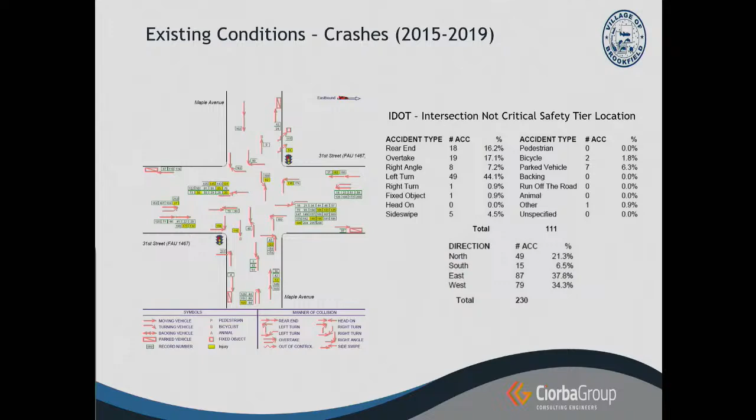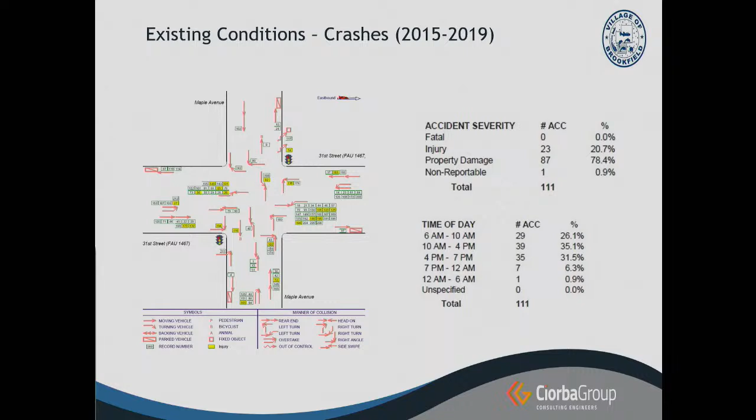As far as the accident severity, 23 of the 111 crashes involved injuries. There were no fatalities within the intersection, and the crashes occurred primarily during the early morning rush hour, the evening rush hour, and at lunchtime.

As far as the existing conditions within this area, it's been noted that there's been an excessive wait along Maple Avenue. We've also been informed by IDOT that there's detector loops that are defective at this intersection. So that might mean that if you're a car waiting at Maple Avenue, the detector loops may not sense you, and it may not switch to a green light for you to get your movement in.

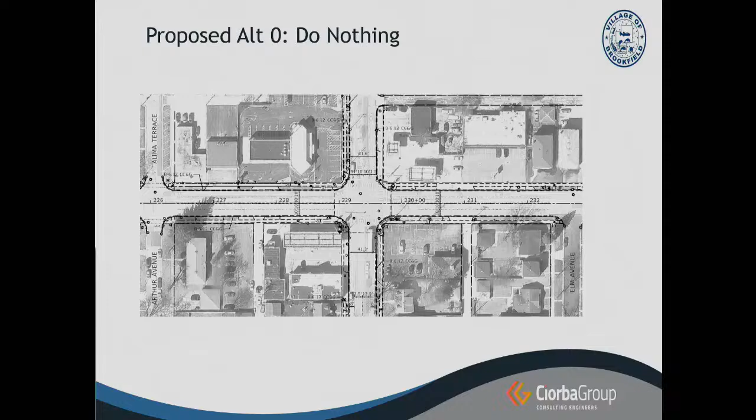The alternates that we looked at, the first one is the do-nothing alternate. And the obvious advantage with this is it's the lowest initial cost. And there could be the chance that the future signal loop repair done by IDOT will improve the performance at this intersection.

Disadvantages. Can I ask how big of a fix is that? I mean, that's something that would seem like would need to be done no matter what is done. Is that a major repair? No, I don't think that's a major repair. It may just be something where IDOT is going to try to do that repair in conjunction with a number of other intersection improvements. So they may not go out just to fix one detector loop.

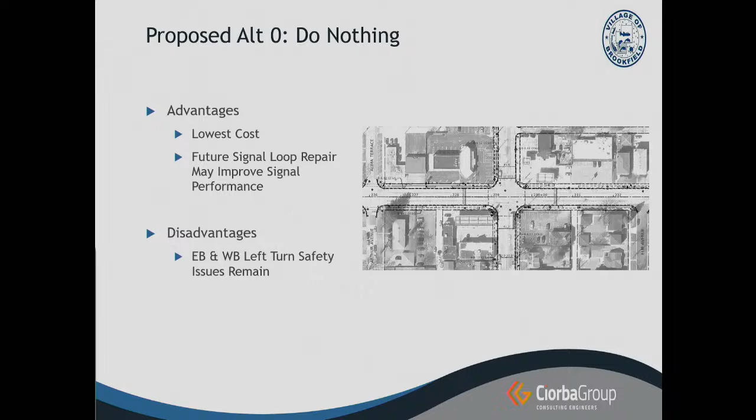They might. Because if I'm not mistaken, there was a problem at 30th and Maple that I think was addressed recently. And it didn't seem like it took that long to fix it. But it was just more of a side note. It seemed like it was not that big of a deal to get it fixed, so. Okay. Yeah, but I haven't heard anything more from IDOT on if that has been repaired or not, but when we asked them the time frame, they said it could be a while before that's done.

Do we know if that's been an issue for a while? Yes. Within years? Yeah, yeah. Well, and I guess in a way, you kind of feel better, hope, that, because I think we've all said that. I'll verify it when I go home tonight. At least 5 years.

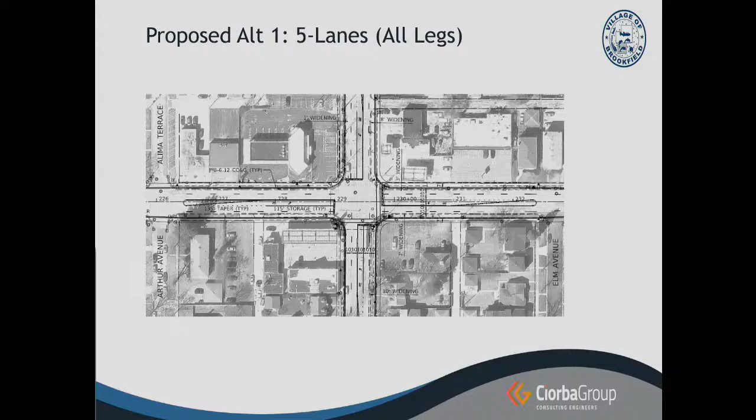One of the first alternates that we looked at was going all in and keeping 2 lanes of traffic in each direction on all legs of the intersection and adding a left turn lane. Now, some of the advantages, we're adding a left turn lane at all legs, so left turning traffic can queue up in their own lane. And we have 2 lanes through all directions, so the intersection capacity will be the largest with this alternative.

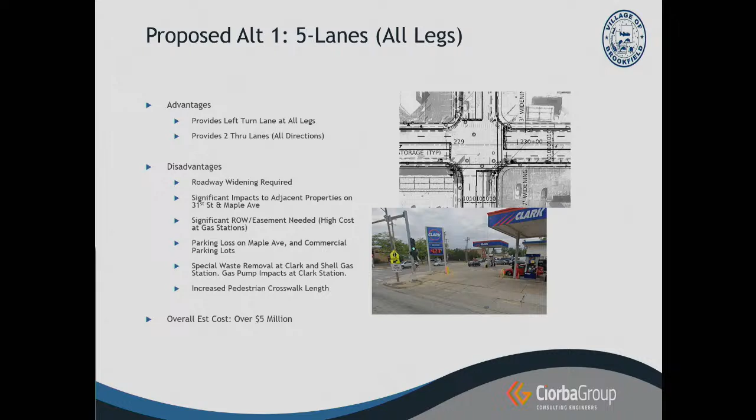The disadvantages are with adding the additional lane, you need to widen the roadway, and this will have significant impacts to the adjacent properties, especially the gas stations at the northeast and southwest corner of the intersection. In addition to the gas stations, there's other adjacent properties that will be impacted. And when you're doing any excavation near the gas stations, you're more likely to have special waste issues with that. The overall cost for this project is, we didn't get too much into the details, but roughly about $5 million is what we were estimating.

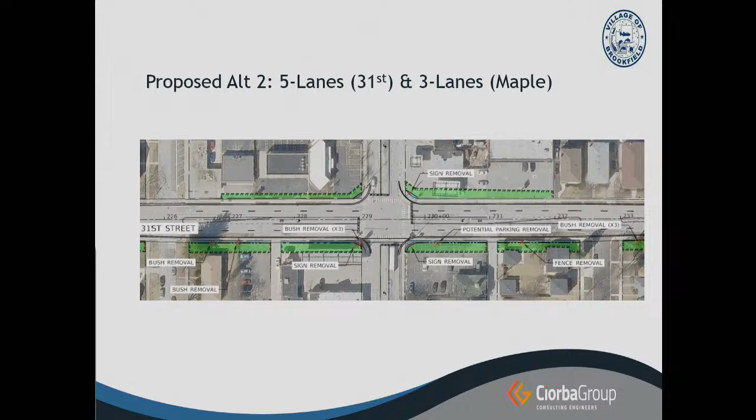The second alternate that we looked at involved providing a 5-lane section along 31st Street and then providing 3 lanes on Maple Avenue. In this alternate, again, we're providing left turn lanes at all legs, so that should improve the left turn collisions. We do have 2 through lanes on 31st Street, which has more traffic on it. And the way we have it striped, it will be very similar on the south leg of Maple Avenue, so we anticipate that there'll be no parking impacts there. This will have to go through IDOT, though, for them to ultimately approve that option.

The disadvantages, sorry if you could back, disadvantages, there's still the roadway widening, and there's still significant impacts like were mentioned for the first alternate, just not quite as severe. The cost for this one is estimated to be about $3 million.

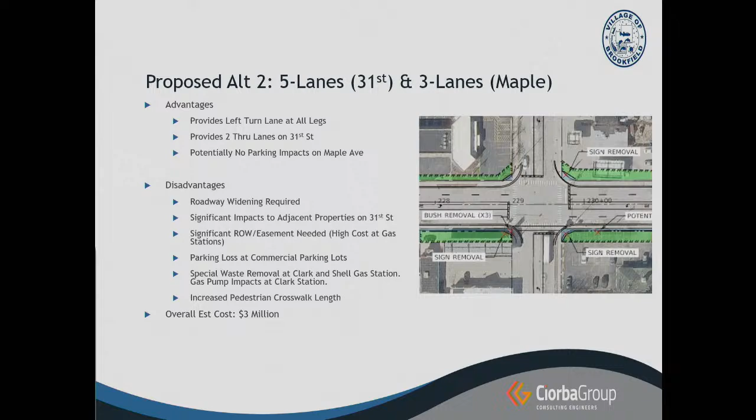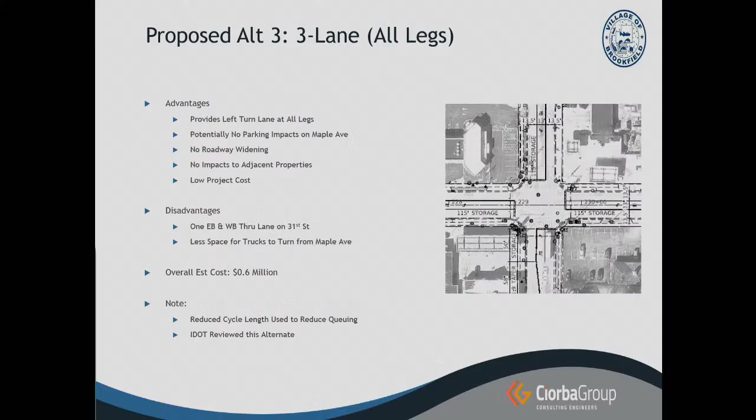As far as the levels of service, just for some background, it's kind of like grades in school. Level of service A is very good. Level of service F is very bad and very congested.

So this is increased traffic within the area. And if you go with the full cycle length along 31st Street, following the signal timings that IDOT currently has...

we had an issue on the north leg, or the southbound movement for Maple, where we had a level of service of F in our analysis. But we were able to, if we reduce the cycle time to half of what it currently is, get more green time more frequently.

That seemed to improve the level of service for the intersection from the analysis that we had, and that should also reduce the amount of queues in the intersection overall.

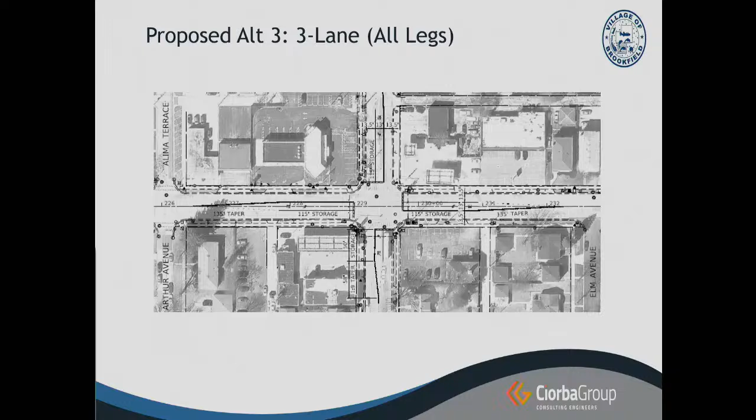So I have a couple questions. One, President Garvey was asking about the trucks turning on and off from Maple onto 31st. I noticed we have - Stevie, can we go back to that drawing, I think it was option 3? So Mark, I see we're shifting the left turn lanes where they overlap the center.

Is it an IDOT requirement to have those line up? Couldn't we leave the left turn lanes where they're at on the center line and keep the same turning radius, with offset left turn lanes instead? That's a possibility, but the issue with offset left turn lanes is that your line of sight is blocked - if you're making a left turn westbound and someone else is making a left turn eastbound, you're blocking each other's vision. And I think that's kind of the existing issue out there right now - you don't have the sight distance, and the number of crashes may not be reduced at all by that.

Understood, yep, I agree. And just for clarity for the board, I want to express that. And then also, we do have a left turn signal on 31st Street to let some of these cars clear out of the left turn lanes - that's one of the advantages.

Derek, can I ask a question? So when you were talking about the left turn, when you stop at a red light to make that right turn for trucks - is it not possible to have the left turn stopping point set back a certain number of feet before the intersection?

Yeah, I think that's something we would anticipate, where they've set back the left turn lane, like we have it at East Avenue in Ogden - that could be a possibility to provide more space that way. So this turn lane, instead of being equal, would probably be set back in here. We can also look at larger radius improvements to help the truck turning, but you have to weigh that against the impact to private property.

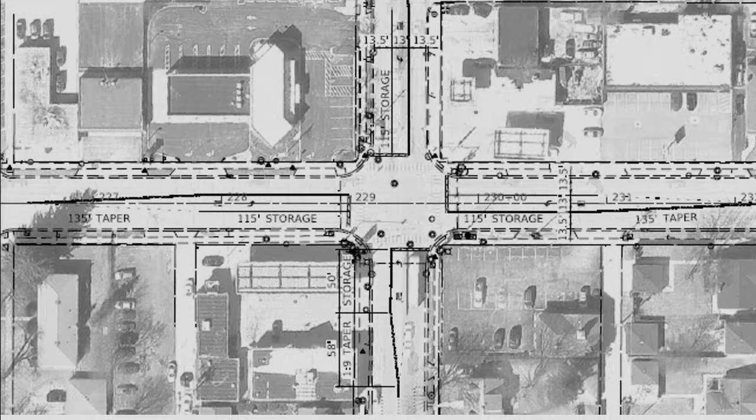Everyone local here realizes that's an intersection where we have a crossing guard, because it's the path to Brook Park School and what used to be St. Louise. There's kids on that corner every morning waiting, and that's always scary with the trucks and cars turning, so it's another reason it's so important, because it's a pathway to the schools.

That would be something we can look into. I know for the northbound and southbound traffic, we have like a 13-foot wide left turn lane. That could be reduced to 11 feet or so, to allow a little bit more of an acceptance width for cars turning left into those areas. So those are some things that could be looked into.

Just as far as increasing the curb radii, that would be a possibility. I just know we've had experience with that with gas stations at other locations, and that's even become an issue, depending on how much you're taking from them.

And if I can, while I'm thinking of it, because we have Chief Adams here - Chief, can our biggest fire rig make that turn? We're talking about semis and trucks, but that's a common route for you guys going to Cantata and the British Home and stuff, coming down Maple to 31st.

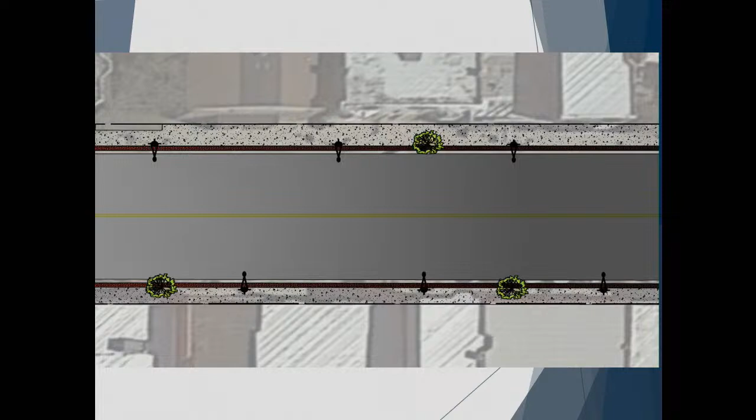The next slide will show the staggered spacing. You typically either look at opposite, where they're opposite each other on the streets. What we currently have out there is a staggered spacing. We're proposing to keep that spacing now with the lighting, so that'll put those lights approximately back right where they're at.

Do I have the understanding correct from last meeting? How does the board feel about the lighting? I think Derek summarized what we're talking about - pedestrian lights only, not the street lighting, not the higher, brighter street lighting, pedestrian lights, the spacing and the height of the pole. I thought this is what we agreed to. Well, I think we wanted at least to see some design and maybe pictures of it.

What it would look like in the spacing and things. So I think you're right, but I didn't want it, and staff didn't want to take it for granted that the decision had been made. But if there's a clear consensus from the board on the lighting options expressed here by staff, then yes.

Can I just have one question on the light poles. The ones they have now are just kind of like, they're not like a hook like this. Does the light go onto the street or onto the sidewalk? Does it overhang towards the buildings or towards the street? Towards the street. Got it. Thanks. Right now they're just straight up fixtures, right?

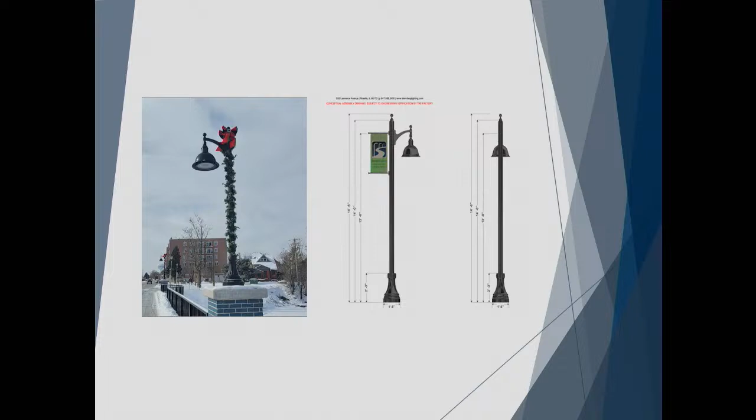They're post-mounted, exactly, right. We're looking at something similar to what we have out on Broadway, and again we tried to match that with the bridge. This is a concept level discussion, so we could advance the design. We'll show you recommendations for the exact mast arm, where the banners are, that'll all come later, but yes.

It'll match, it'll be similar to what we have out on Broadway and on the bridge. Is there, I mean we have string lighting and street lighting, string lights along there now. These poles have that ability to carry that? They will, right, and in the last slide I list some amenities we'll certainly work through all the details with staff. But yes, banners, arms for the planters, all are in play here, and I anticipate we'll have them, maybe whether it's every pole or every other pole, for instance the planters.

On the hanging planters. All right, so one down. We got two - well, more. Stevie, could you go back to the slide you had up that showed the bump outs right there at the end? The one you're paging through. I think that was Google Earth.

Well, do we look to moving? I mean, those street lights were at where they were at, and we did the bump out. Is that something we look to maybe moving that out more? Oh yeah, that one. Yeah, we're not locked into that location. Again, I haven't really proposed that we will or won't, but yes, we can look at those locations at the bump outs. You're right, those are the original locations prior to the bump out.

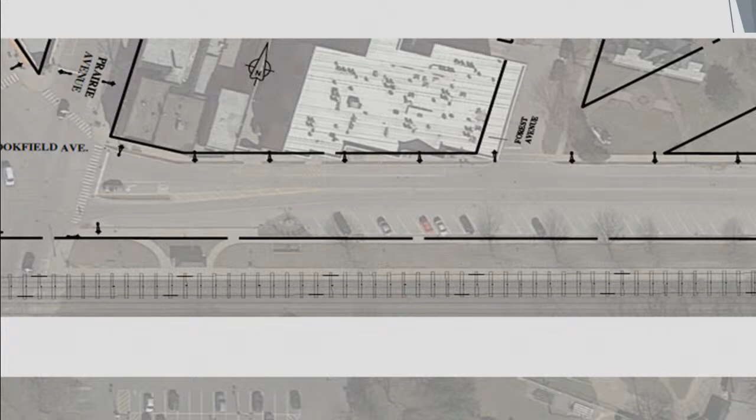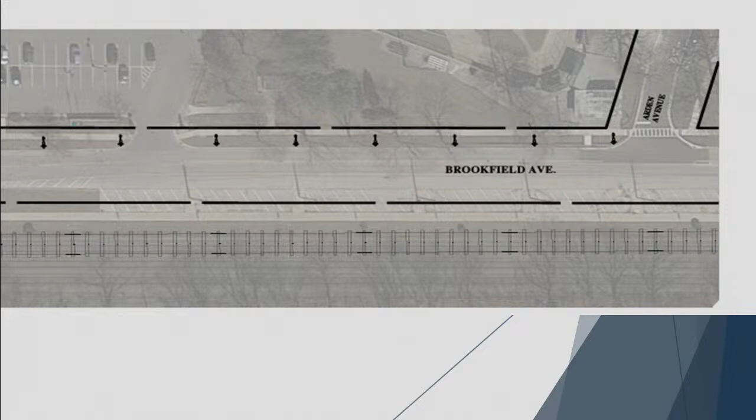I'll mention that the lighting from Prairie all the way to the east side of the Village Hall driveway, we for sure want to do. We're showing going to Arden in the concept plan. When we met with the group, it was noted that between the Village Hall driveway and Arden there's very dense tree cover. We don't really want to take those trees down, so during final design we'll work through the details. If we can't fit them, there's a chance we'd forego those. One option: we want to stay in the right-of-way. Even though it's our property, on a federally funded project it would be much better to stay in our right-of-way. But if we had to, we might put those lights at the back of the walk. We'll look into that in more detail if this is the design option we pursue.

Just looking for consensus: pedestrian level lights, Prairie to Arden, correct? Everybody okay with that?

And obviously that area east of the Village Hall entry and Arden, along Overholt Field—is it just on one side of the street? Just on the north side. Because we have the commuter parking and lighting over there, that's the railroad basically. Is there lighting? Sorry, I'm trying to picture it. Yeah, there's lighting on the other side. But we don't need the roadway lighting because there is light on the other side as well. So the pedestrian lighting is okay?

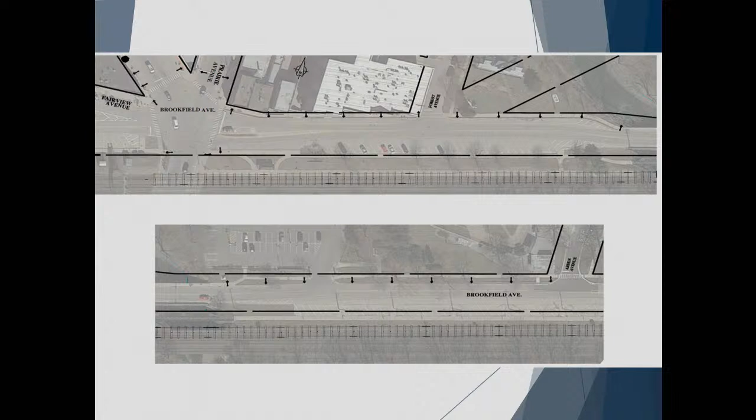To be clear, most of our roadways, including our collectors, don't meet minimum—and here's the word, recommended, not required—lighting levels, okay? Even some with concrete light poles like Grand Boulevard, looking at the spacing, I haven't been out there with a light meter, but I don't expect Grand Boulevard, even with lighting as frequent as it is, meets minimum recommended levels. We're not having, I'll go into this when we talk intersections, a bunch of nighttime accidents. I don't think it's a safety issue. So bottom line, I think we're only improving it, but we're not meeting minimum recommended levels. Thanks. Okay.

So, consensus on the Brookfield Avenue lighting design, yes? Yes. Thank you. Okay, the board did ask us to look at a couple of intersection lighting designs, one at Brookfield, Grand, Prairie, and the second at Grant and Sunnyside. The next bullet point applies to both of those locations.

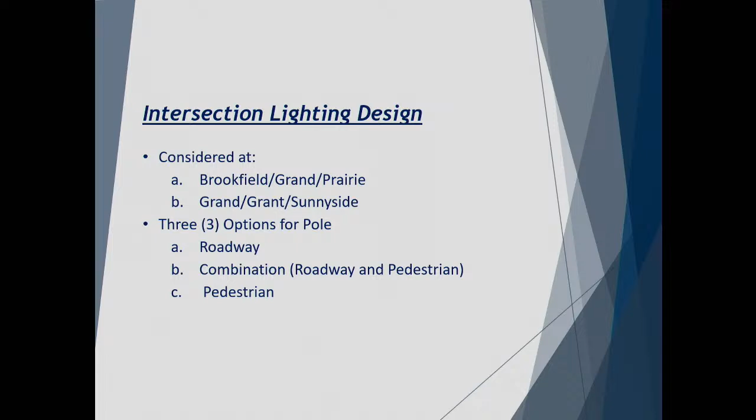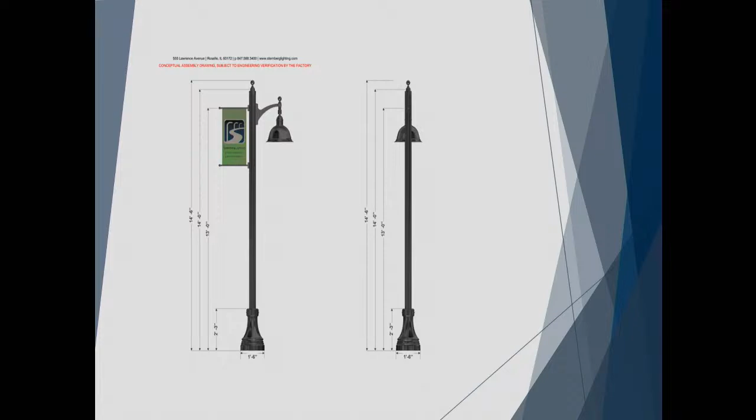I'll go through the lighting design we did. The intersection of Brookfield, Prairie, and Grand is a very large intersection, and it's really difficult to cover the center of that intersection with lights on the corner. We did find a way to get it lit and meet minimum recommended standards, however we had to install 10 lights on that corner—there's 5 corners, 2 per corner. I did ask Chief Mike to look into the 3-year accident history; we only had a total of 8 accidents, which is not high, and only 1 nighttime accident in 3 years. So I really don't think we have a safety issue out there based on the light level, but we can still certainly improve it with the roadway or combination lights.

If we're going to install those, total of 10 lights, the cost is $150,000. I will point out there are 2 roadway lights on the south side right now.

We have to coordinate that with BNSF. They worry how close you get with your lighting to the railroad tracks. I think one of the things they're worried about is if you have a knockdown, they don't want the pole extending across the tracks. I think we all understand that. The two poles out there, I'm not sure would meet those requirements. So if we do go with roadway or combination lighting, it'll be set back further from the tracks to meet those requirements.

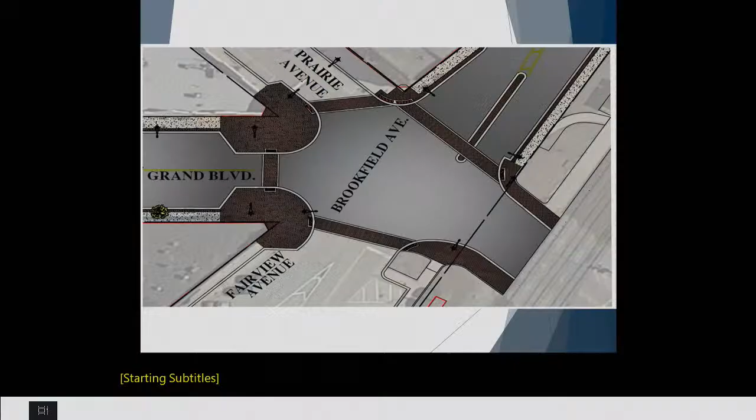Would the other lights be on the apex of the bump outs? Is that where they would be? They would. Can you go back, Stevie, I had a slide, and again, this isn't gonna show up great, but yes, they're at each of those. There's actually five corners, and there's two lights at each of the five corners. To get that lighting to cast across that whole intersection, we needed to put two lights on each, and the heads face in different directions to get the coverage.

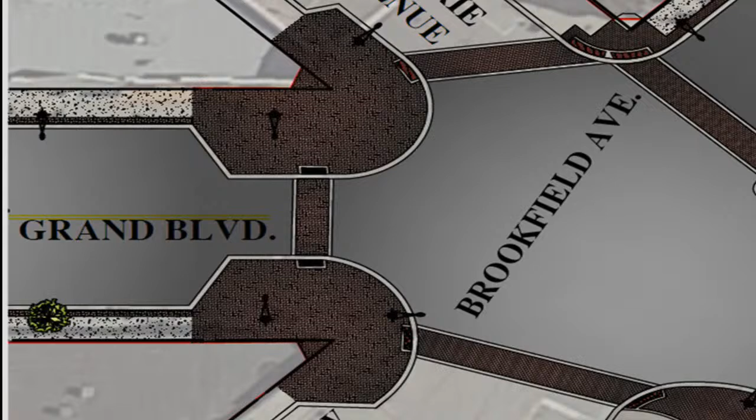I personally like the combo. I like the combination because you'll still have the pedestrian, but then you have the street one. I like the combination one. My recommendations are on the next slide. The recommendation, and this is probably more my recommendation, is I don't know that you need the 10 roadway lights. We're not having a safety issue out there.

I like Derek's recommendation for this. I'm good with that. Getting some head nods over on this side. So you're saying the roadway lights on the south part of the intersection towards the tracks, and no roadway height lights on those other three bump outs? Right, we'd have more pedestrian lighting on those corners. To me, it led to a consistent feel, as you cross the intersection we get into the pedestrian lights, but up by the tracks we would have the roadway lights.

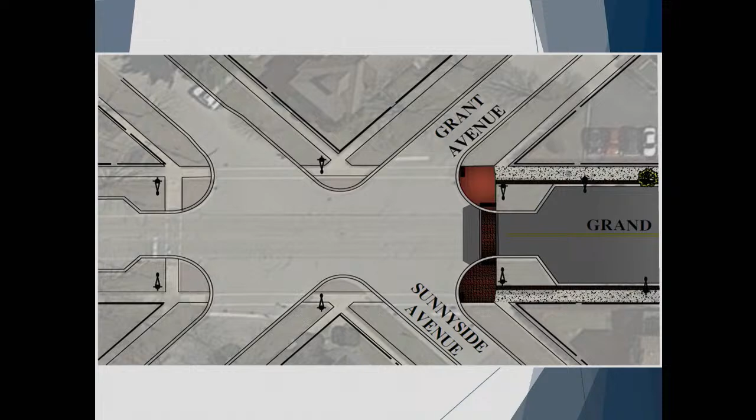If we put the 6 roadway lights in, we would estimate a cost of $100,000. Village share is $20,000, just to give you numbers. If we could go to that next slide, Stevie. So what I'd like to recommend is, as I mentioned at the last meeting, we currently have the concrete poles down Grand. They run to the circle and then from the circle all the way to 31st Street. As a future improvement, hopefully near future, I think it's a great improvement to tie the lighting on Grand to the lighting on Broadway.

And the reason I bring it up is that what type of lighting we put on the 2 blocks of Grand from Grant to the circle may impact what we do here. It's currently roadway lighting on Grand from Grant to the circle. I don't believe it's going to meet minimum recommended lighting levels. If we were going to put pedestrian lighting for those next 2 blocks, then I think this intersection would certainly be pedestrian lighting.

If we feel the long-term plan is to install roadway or combo poles for the 2 blocks north of Grant, then we can look at whether we want to transition in this intersection to roadway or combo, or keep pedestrian till we get to the north side of Grant. And I'm looking for a lot of input. If we need 2 more weeks and everyone wants to think about this, that's okay. We have a lot of other items to design, but does that make sense? I think you've laid out the issue and the options for the board.

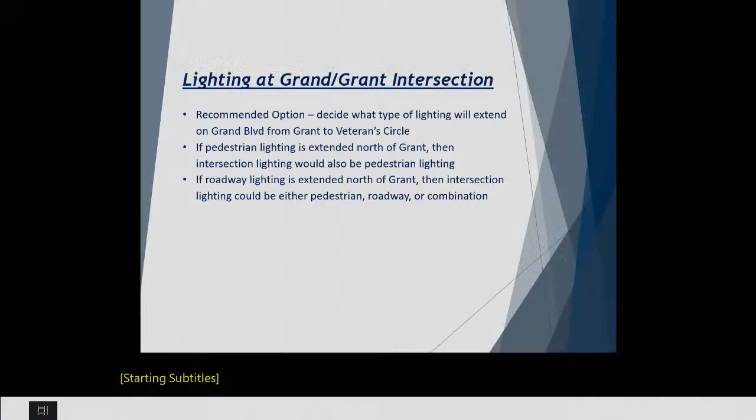Is there any board member input at this point in time? I think you all understand the issue. Is it something you need more time on, this particular topic? I'd love some pedestrian level lighting the rest of the way down Grand. I walk it a lot from the train, and I don't think the roadway level lighting makes you feel like you have adequate light. So I'd say it's a combo light or pedestrian the rest of the way.

I agree with Trustee Calusi. My preference is probably the combo, because starting at this intersection north, having walked it today and really looked at it, because of the height of the trees and the density there, the combo would work. Okay. Those are residential blocks there, basically. Is there any concern that we're changing the character of those residential blocks? It's changing for the better.

I do too. I'm not saying it is. If you live in one of those homes, with the design of the lights, they're not going into the homes, they're just lighting up the sidewalks better. Well, speaking as someone who lives on Grand with one of these light poles in my front yard, these look very utilitarian, and I think that combo light with the roadway and the pedestrian would be an improvement in character. I don't favor one or the other.

I will point out, about changing the character: there are roadway lights now. If it was pedestrian now or just the ComEd poles at the corners and mid-block, I think you would be changing the character, but there are roadway lights out there now on Grand. No, and I realize the roadway lights are there, but with the combo you're basically lighting up the pedestrian sidewalks in front of homes on that stretch. I'm not saying it's a bad thing or a good thing, I'm just saying it's definitely changing the character.

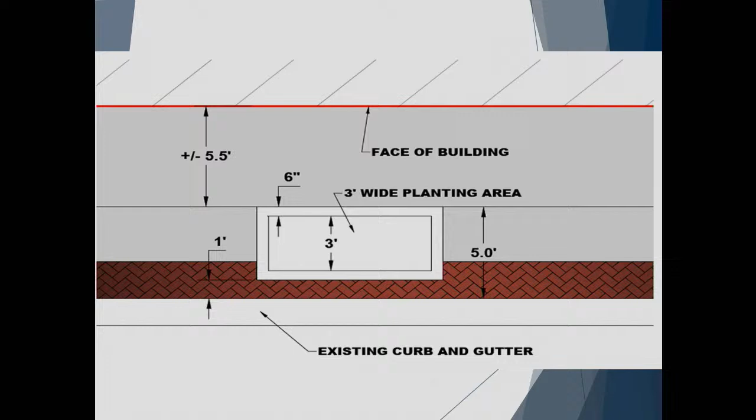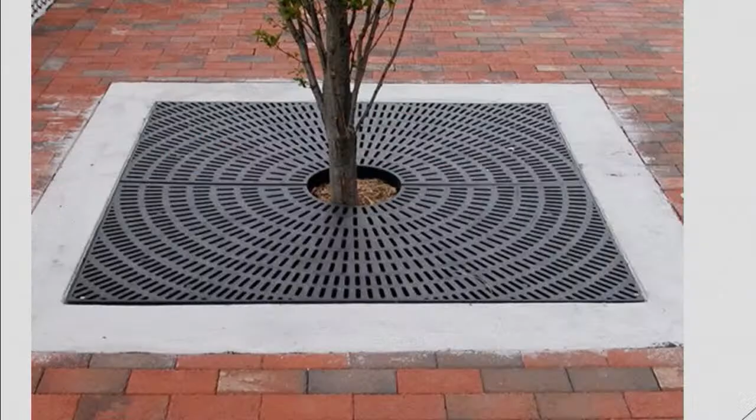Ultimately, we've kind of changed our tune. We're recommending we go back in with tree grates. We have a couple options. One design you see often is a perimeter curb around there. I say curb, it's at grade, but a perimeter concrete strip is a better way to describe it. It's a little easier for construction. If we put the 6-inch curb around the perimeter, we'd only have a 4x4 tree grate within there. I'll address, I know there's some root concerns. We do have some ideas about that if we go with this tree grate.

The second option is we put in a 5-foot by 5-foot tree grate. Again, we don't have room to put that perimeter curb in. This picture doesn't show what our design is, but we have a 1-foot strip of curb. What's not shown on the perimeters, there's an angle iron that sits around the perimeter. That's what those tree grates rest on. When it's up against concrete, that's fine, we pour a little lip on there and embed the angle iron in. The brick pavers create a little more challenge for how to do that, but we can get it done. If that's what the board prefers is this look, we can get a design done. So this would be the 5x5.

Some options before we leave this. The tree grates consist of 2 pieces, so they can be removed. There's a joint down the middle. You can remove these, maintain them, and then reset them. It's not just one piece. And they do offer tree grates where the rings around the tree can snap off, so in case the trunk starts getting larger, Public Works can pull those out and snap those off. That's what we'd propose, to make the circle bigger. You take the grates out and you can snap off the sections that are ring. You can kind of see how it's segmented there, and you can snap off that ring as things get larger.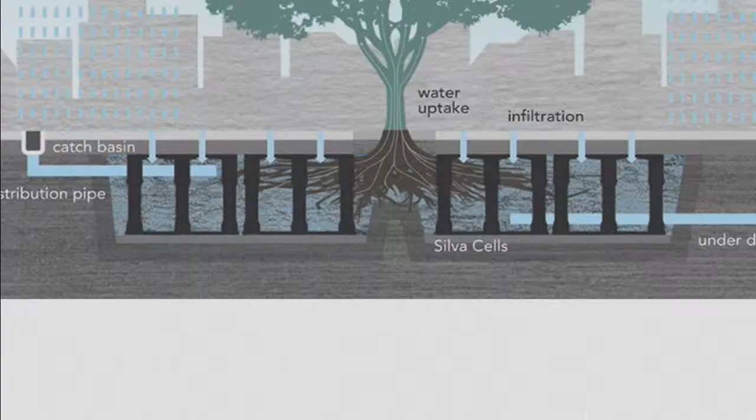I have a couple more pictures of the Silva Cells. Just a description, we have used these. They're somewhat new, but we've used these on a previous project out in Park Ridge, where they did a permeable paver parking lot. It's basically a grid of PVC tubes. You fill in all these voids here. This is during the installation process. You fill it in with an amended soil that the roots can go through, and then you pack on top of that.

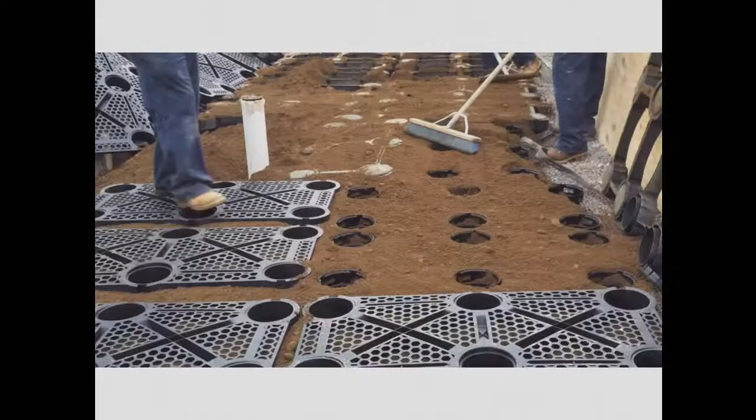You can see that there's a plate that goes on top of those. Those circles are the PVC tubes, and you keep backfilling. You put those plates on it, put a filter fabric over it, and then you could put your stone bedding for the pavers or sidewalk. The one we did was installed in '21, so it's been about 2 full years, and we haven't seen any settlement over there. So we would propose to use these at our tree grate locations.

I'd open up the discussion from the board. I know there's a lot there on this one.

Those are cool. I like it. I like using the runoff water to help water them too.

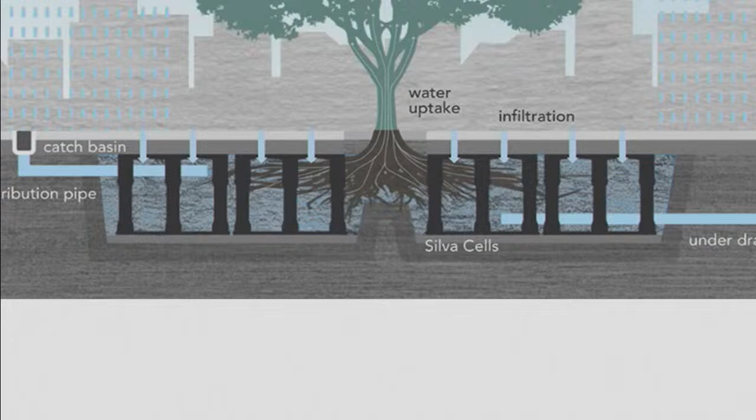It's good that they have under drains as well, because surprisingly, some of these trees can sit in too much water, get too much. That's not usually the problem in an urban environment, but you're right.

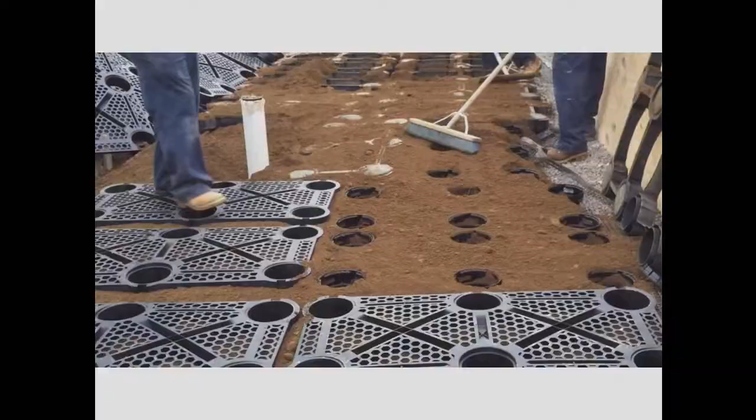I hate to ask, but what's the cost difference between the various options? You kind of got me there, I didn't look up our costs. I will say this, at 20% local share, I guess I would encourage the board to do what they think's best. I really don't know, I'd be guessing it might be 10 grand a piece, and there's, I forget how many trees we have, 12 or 13 currently, but your cost is probably in a range of 25 grand on your share. I can send information on that better, but I think I would do whatever you prefer.

We've struggled so much with getting the trees to grow in our business districts. I'd like to do something, and I just brought up the money because Doug's always staring me down, and if I don't ask about money, I just... Is he holding up signs? His facial expressions during the various options.

So here, let me try and do my job. Is the idea of the curbed planters still on anyone's radar based on what staff's presented and the trustee input? No, but I really like those. I do too, look forward to talking about that in a minute. Okay, so no one's pushing the curb planter anymore, so that eliminates that option.

The 4x4 tree grate, am I correct that the option the 5x5 has with the inner removable rings expansion isn't available in the 4x4? No, it's available in both. Okay, good. So we've kind of got it down to 4x4, 5x5, and the Silva cells.

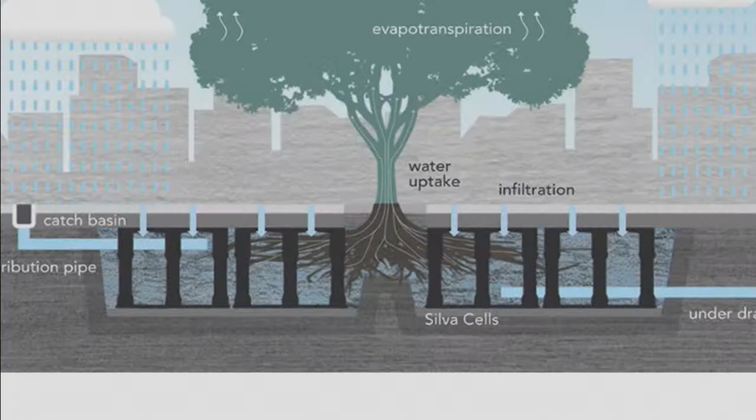And then when you get to the base of the tree, what would you see? You're gonna see the tree grate and you'll see soil above it. Just like the Silva cell, it's all below ground.

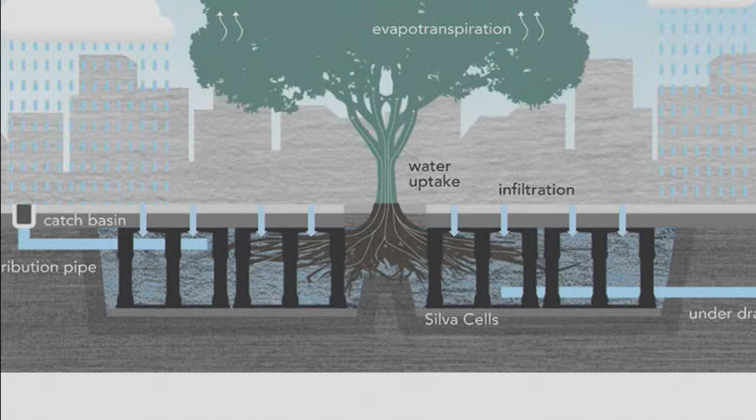But there's some kind of grate, how big is the grate at that point? When I'm saying the grate, it's the cast iron tree grate. You won't see any of this plastic. This is all substructure that's 6 to 12 inches below the surface.

What it does is it provides you with some storage below. If you just put the soil in, you'd be worried about settlement. This is basically providing some base support for hardscape improvements above the amended soil, below where the roots grow.

What we're trying to address is, as Derek mentioned, so many of our trees along Grand and Broadway don't survive. This was not done. We did not use or know about Silva cells. Our assumption is that we have smaller grates that don't accommodate the trunk, and underneath the surface of the ground, the village did not accommodate space for roots to grow. So what we've gotten is kind of a crapshoot of trees - some survive, but most have not.

Are these the type of things where the problem is the root system's going to lift or raise the sidewalk, or get into sewer lines, some of the things we have in residential? Not typically - I think the roots will choose to go down towards the water source.

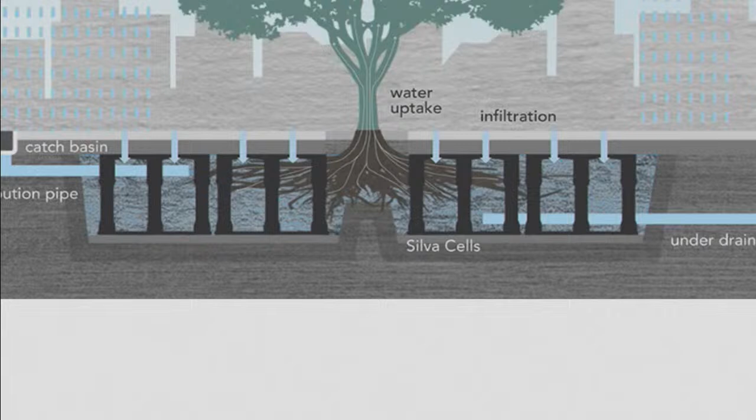Derek, will the tree grate with the curb around it still work with the Silva cells? It does, yes.

I like this idea here. I think that looks probably nicer, but we also see, looking down on Prairie, like Derek said, when we butt up to the pavers, there's too much there that seems like it can move around. Whereas something like this, that angle iron that fits underneath the grate, I think will be more stable for it. It does help.

The design challenge, if this was a 5x5 and butted up to here, is these brick pavers are 2 1/4 inches, and these grates are only about 1 inch, so I need a concrete base under this to set that up. Metal angle iron - it's very easy to frame up on it when I have the curb around there. We've done that lots of times, very common.

I could do it where it's just sidewalk, where the pavers come all the way up. We may be able to find a way - it'd be a challenge.

So if the board doesn't object, I will say the 4x4 is - with the Silva cells, I mean - yes. At the same time, our pavers wouldn't look like that though if we're doing the 2 feet along the curb. Agreed, that would be the challenge - the pavers would butt up to it really along the street side. The rest of it would be a curb cycling in, so it wouldn't quite look like that, but I think it'll be much more durable.

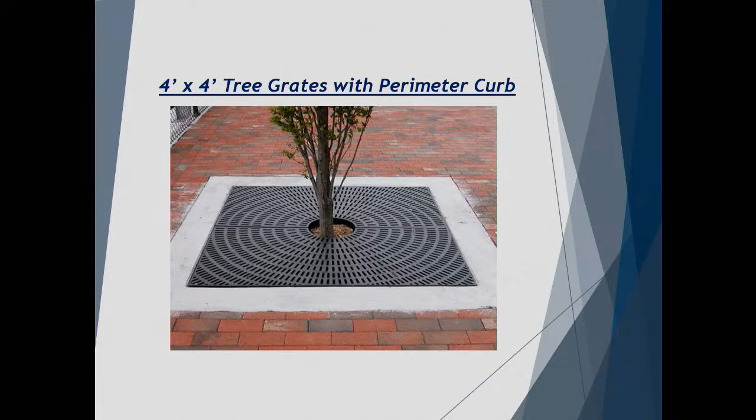We could do the 4x4 using the design of the other grate though, correct? Did the other grate come in the 4x4? Yes, that grate in the 4x4 - we haven't even gotten into the grates yet - and then I almost said sickle cell, but the Silva cell underneath.

We don't want that - yeah, the Silva cell underneath the grate, okay, and then there's the 4x4. We haven't even gotten into grate options. Again, I envision that small group doing that. We can come back to it, but you should be able to get all these grate options in 4x4 or 5x5.

Can I just ask about process? Have the businesses on 3,700 Grand had any input on any of these items?

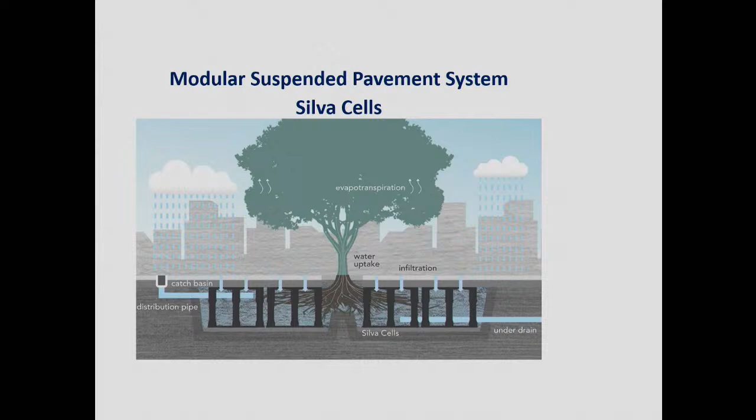Are you asking about utilities? No, the businesses, these options for lighting. On 3,700, we have not had any business meetings and public meetings here. Is that, will that come in later, or are there other plans?

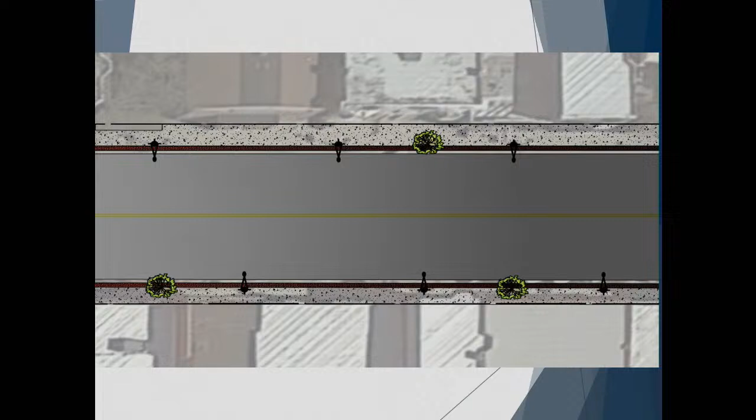I do have some discussion on the spacing, and one of our recommendations, there were a couple options discussed at the last board meeting. Currently, and Stevie, can you keep flipping through? One more, okay, tree spacing, there we go. So currently, the tree spacing is every other light. There was some input from the board, I thought both directions. I know it was mentioned maybe having a tree between every light. As we met with staff, the preference was still to go every other light, but there was a suggestion made to add more greenery.

An option would be on the next slide to add more. We have some potted flower pots out there. We could put those between, so you'd have a tree between one set of lights, then put some decorative flower pots out there. But that's a discussion, and part of our thought process was, since the lighting's the same, and when we built this originally, there was a lot of communication with the businesses, and there was some concern with blocking signs, and that's pretty common in streetscape areas. One of the things we liked is by keeping the light spacing the same, we could keep the tree locations the same, and I don't anticipate a lot of objections. If we want to go to every light, trees between every light, then we just will have to spot those.

So that's more board input I'm looking at. I will say the Beautification Commission has gotten some feedback, not about how beautiful the planters are, which people enjoy them, but about it infringing on their outdoor seating space. So I think if we went that route, at least for the restaurants that we're allowing outdoor seating, is just to think about, well, it's the right of way, so we can make some decisions about how that's used versus how much of the space is available for their seating. But I know they're investing in furniture and that kind of thing, and so there was some surprise by us plopping a couple of planters out there and what that impacted their seating arrangement. So I think with this next piece of the conversation, we should just have a conversation with some of those restaurants about it. Sure, so we didn't give them enough seating. The planter was too close to people's elbow.

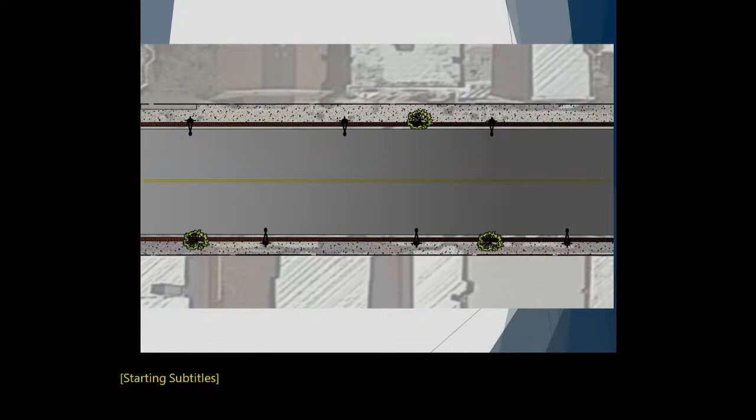But my comment is, I wouldn't be so concerned about trees blocking signs, because no matter where you put a sign, even if we only put trees as Derek is proposing, somebody's gonna have a sign blocked. So if we try to plant trees where we're never going to block a sign, it's not gonna happen. You mentioned Paisans, that's the biggest tree out there, and I think they're doing extremely well. So I would recommend you not make decisions on where to put trees because you're worried about blocking signage.

I understand that point, but we have a PIP program where we're offering people money to put new signage, so obviously signage is important. I know everywhere we put a tree there's going to be some blockage. I'm just concerned about the number of them and the amount of space they take up.

But it's up to the board. I think this is a decision, as Derek pointed out, we've picked where the lights were before without necessarily going to the business owners. I don't know that we can go to each business owner and ask if they want a tree here or not. I think staff has to come forward with a recommendation, but just the general idea of how far apart the trees are and how many we're going to put is what you're looking for from us?

It is, yeah, and I think with the two options, when that initial design was done, you get your light spacing, but then you play with it and move it up and down to see where the trees aren't blocked. I don't think the trees block too many of the signs, we tried to minimize that back then.